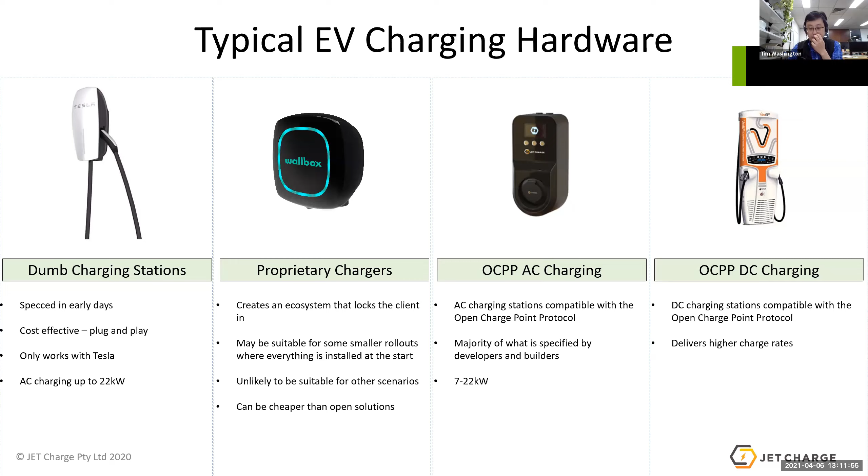Okay, so that's kind of like hardware, and you can go into the weeds a little bit on that, but that's essentially an overview of hardware.

An equally important topic is this concept of energy management, because most buildings won't have enough electrical capacity - even greenfields - to service 100% of the car park when everyone's charging their cars. So you need energy management to make sure that whatever capacity you do have is spread between the charging stations. So how does it work?

It works pretty much exactly how you think: when there aren't too many cars, they all charge at the full rate. At night, when cars start coming back from work and the lifts are going, aircon and induction cooktops are on and all of that, it lowers everyone's charge rate or queues people depending on the system, making sure the charging doesn't take as much electricity. Then when everyone's gone to sleep, and there's less electricity being used by the building, the charge rate ramps up, and all the vehicles are fully charged in the morning.

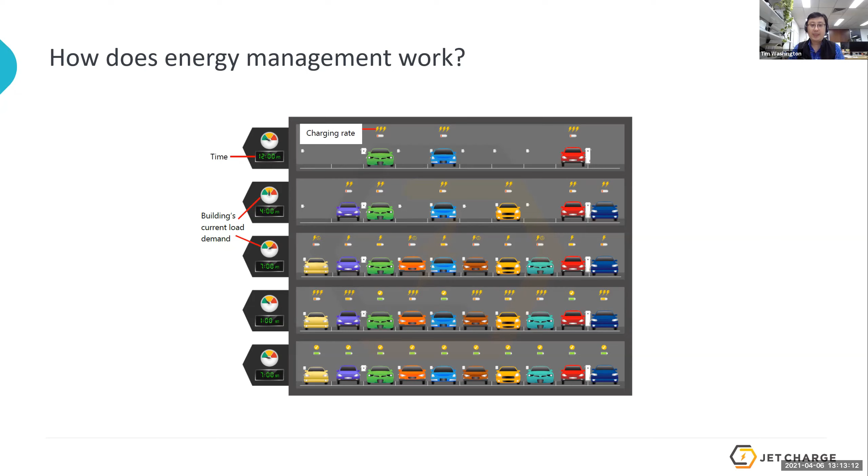There are a few systems in the market that can do this. JetCharge has one thing called JetCharge Core, and basically it just makes sure that none of the circuit breakers trip.

I won't go through this in too much detail, but essentially what you're looking for in an energy management system is something that works with different types of chargers and different types of software platforms. That's really important.

So how does it work? Basically, it dynamically analyzes how much capacity is available on each circuit, and then allocates that capacity to charging stations that are connected. I think this graph probably doesn't mean much at the moment without context.

But what it's doing is detecting excess solar being pumped into the grid - this is actually our office. And if any vehicles were charging, it would take that excess solar and pump it back into the vehicles, as well as whatever else the vehicle requires. So this happens on a building by building level, precinct by precinct level.

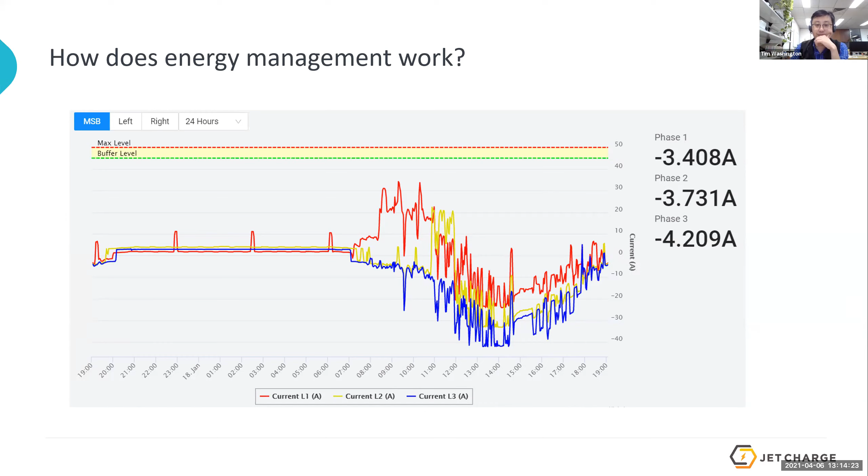Even more than that, as we go to the next step, which is essentially not only being able to charge when there's enough capacity, but also being able to discharge the vehicle when the building doesn't have enough capacity. This concept is what we call bi-directional charging, and that's going to happen probably in the next 4 to 5 years.

We're currently working on some fairly bleeding edge projects where we're taking electricity out of the vehicle to support the grid when it's under pressure. In the next 5 years, a lot of vehicles are going to be able to do this. And when you start having fleets of vehicles in the building capable of bi-directional charging, they have the potential to replace stationary storage.

Except the developer hasn't had to pay for that, right? It's the individual tenants who pay for that, and you're utilizing their battery through a variety of different business models. And what it allows you to do is meet site requirements in the same way a battery would. It's just something to keep in mind.

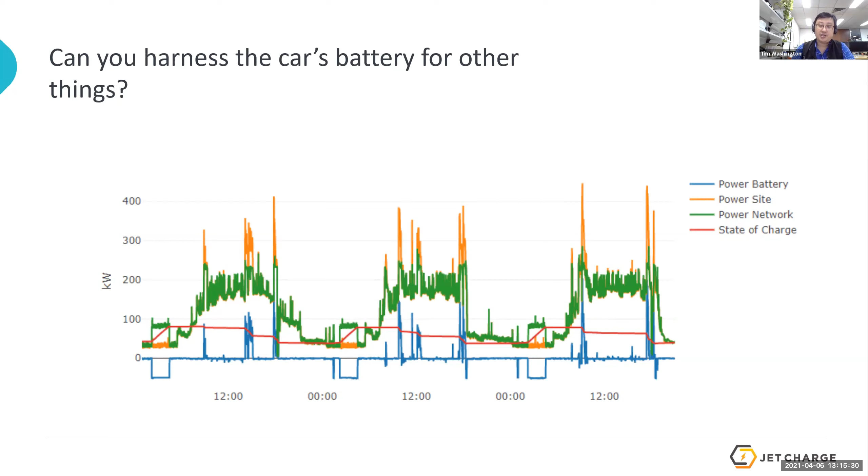People use energy management for different reasons. For some of our clients, it's essentially to make sure that they don't trip breakers. For some, it's to make sure they keep their demand charges on the electricity side really low. And then others, for example with bus depots we're working on, it's to make sure the buses go out on time, but for the lowest possible cost. So you start needing energy management for different things.

Then the last thing we touch on is this concept of how do you monitor the electricity going through these charging stations and bill for it. Without being too salesy about it, that's what we use Chargefox for, though there are other platforms on the market that do similar things. It basically measures how much electricity is going through the charging station and then bills accordingly, either on credit card or through an actual bill.

All of the charging stations you specify into these buildings should have the capability of having billing requirements, because long term no one's giving stuff away for free, everyone is going to want to recover at least the electricity cost. This is already very established in the markets we work with: all the charging stations are connected, they're all OCPP compatible, and they're all connected to a platform like Chargefox, which gives you a dashboard showing how much electricity is being used. You can get this from different service providers.

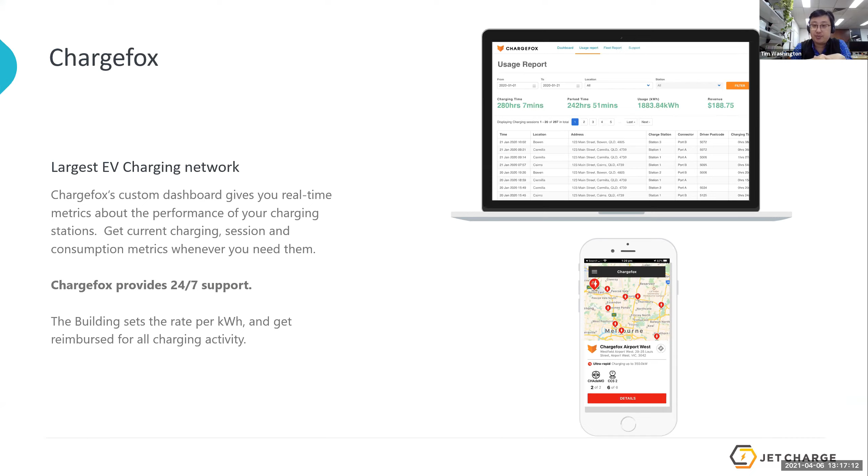The last thing I'll talk about is retrofits. There's a real stigma around retrofits within the EV charging world because it's seen as too hard, that you can't do whole buildings worth of charging if they've already been constructed. But it's something we say you can do, ranging from a single charging station in someone's own car space all the way through to whole of building fit outs.

And there are a lot more brownfield buildings than greenfield ones. So with energy management, you can transform an entire existing building into one that caters for 100% penetration of electric vehicles. But it requires energy management, good planning, and some sophisticated electricals. So retrofits are possible.

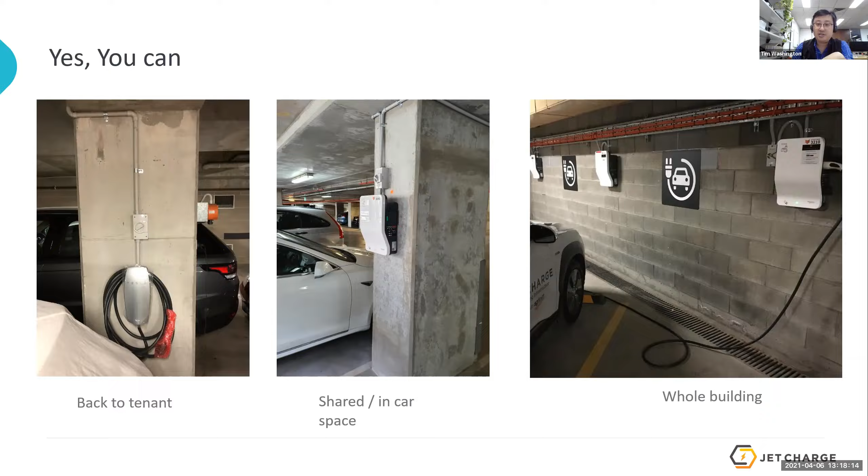So look, it's a pretty big topic, and there's a lot that goes into the design of an EV charging system. But the overall message I want to send is that EVs are coming, and it doesn't really matter whether they're coming this year, next year, or in 2025. When they do come, it will be at a rate that not many of us are prepared for, including us here at JetCharge. It's just going to be too fast. But they're all going to come. It's going to be a really important part of our buildings and really important for us to achieve our environmental goals as a country, so I encourage you to start looking at it and designing for it.

I'm going to jump straight into sharing the screen, let me know if that's worked. Is that going, Jennifer? Yes, that is fine, it just needs to be flipped over to full screen. Is that better? I think we can still just see the preview. Hang on, let me try that again then. I'm on twin screens here and it gets a little bit confusing as to which one I should be running. Is that better? Can't see it yet. There we go. Perfect, great.

I wanted to talk about sustainable buildings and a different way of thinking about how we manage our cities, using water as an example. This first diagram goes back to Edwin Chadwick, 1843, and it's still very much how we plan water use in our cities. The idea is you find somewhere out in the bush with a big dam, bring water into the city through pipes, build a whole lot more pipes, put it through a sewage treatment plant and get rid of it. It's a linear system, based around the idea of the city as a unit, as what you're supplying.

Up in Queensland, we use 450 gigalitres of water a year, so you need dams and treatment plants that can supply 450 gigalitres, and then sewage treatment plants that can treat about 75% of that, and send them out to the ocean. That's how we think about cities in all sorts of ways, to some extent energy and transport and a whole lot of other things.

Some of the things that kind of thinking doesn't capture - this is just an example to show what that linear in-out system doesn't account for. This is a diagram comparing a natural forest with an urban area. On the left, with the natural forest, you have rain. Nearly half of the rain falling is absorbed by the trees, goes down into the soil and becomes part of the water table, maintaining a consistent level of water in the creek. Nearly half of the rain falling evaporates and evapotranspirates from the plants, cooling down that whole forest and keeping things cool.

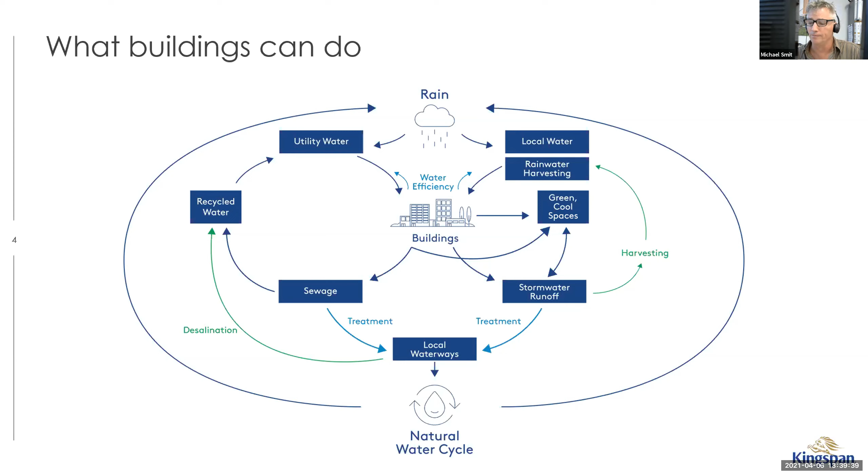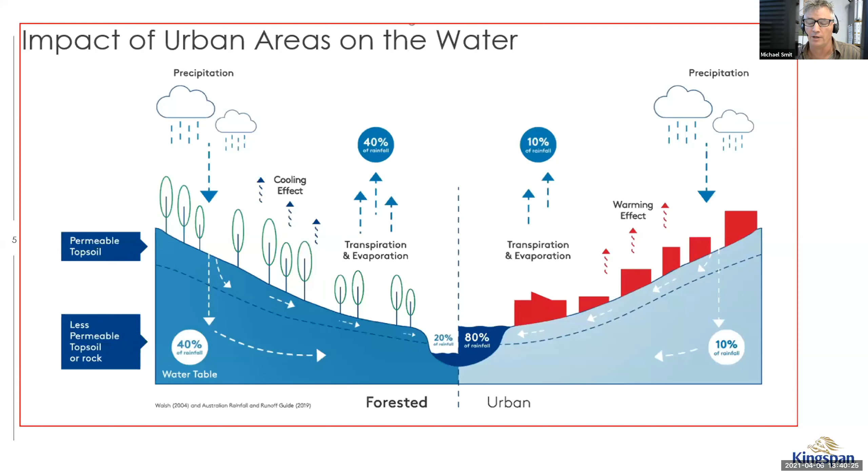Going back to that first diagram where I talked about the difference between natural systems and urban systems - if you imagine putting a house on the left-hand side and getting that building to replicate what's happening in nature, you can have a building that captures 80% of the water landing on its roof, creating spaces where that water permeates down into the water table, giving higher water tables and more consistent stream flows, while more of that water is captured and used to maintain green spaces around it. So you start to replicate that 40% transpiration and evaporation, cooling down those cities.

This stuff has been around for a while. What's really interesting is some work that Peter Coombes has done, looking at how these small design changes can impact the whole city. It's quite difficult to explain big data and systems frameworks, so I've used an example which is by no means perfect, but I think it gives you an opportunity to see how it's a different way of thinking and a different scale of thinking.

So I've used traffic as an example, and traffic and transport aren't part of the modelling work that Peter does generally, but as an example, when we look at a city, we might say there are 7 vehicle movements every day for every dwelling. So 100,000 dwellings will give you 700,000 vehicle movements moving around the city - that's looking at the whole city and traffic movements right across it.

Using new technology and the kind of thinking that Google uses, you can use what they call big data, which is very detailed data at very small time frames. Google uses the actual data about where cars are to map traffic, using thousands, millions, tens of millions of data units to create a model of how the city is moving and how transport's happening.

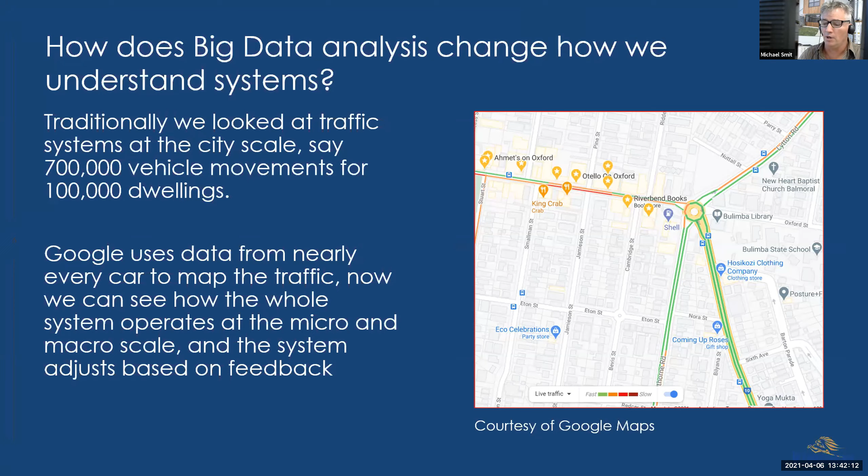Not only is it a model of how many movements there are, but because it's a live system, you're also getting feedback from the system, so that when you get higher points of traffic use, the traffic around that starts to adapt - it goes, no, I don't think I'll go down there, there's too much traffic, and starts to take different options. So you get a dynamic feedback within the system. That's not a bad metaphor for the kind of work Peter Coombes is doing.

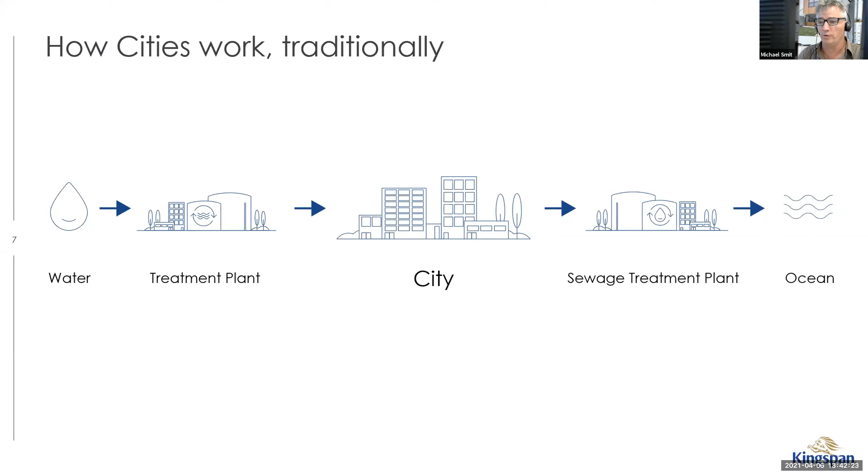Dropping back to that diagram before, traditionally we've looked at the city with water moving in and water moving out. What Coombes has done is look at water flows - not just drinking water, but utility flows for water and sewage, because there's obviously a close connection between those two, but also the stormwater.

Peter's used data at 6-minute intervals based on the detailed behaviour of both households and the utility network. We tend to think of all buildings in the city being roughly the same for modelling purposes - Peter said, well, no, that's not right. A townhouse, an apartment unit, or a separate house will use water very differently, and the number of people in the house will change, along with their income and all those sorts of things - and then they're influenced by the weather.

How we use water is actually influenced quite a lot by whether or not it's raining, whether we're in drought, or whether we perceive that we're in surplus for water. So he's modelled those sorts of things at those 6-minute time sequences for over 100 years of climate data.

That's created, and a digital twin's not a bad metaphor for that. He's created a model of the city, and having that model, we can start to model different scenarios - say, what would happen if we had a rainwater tank on every building? What if we only used desalination? What if we built big recycling plants everywhere? What's happening now in terms of water getting from treatment stations to the house.

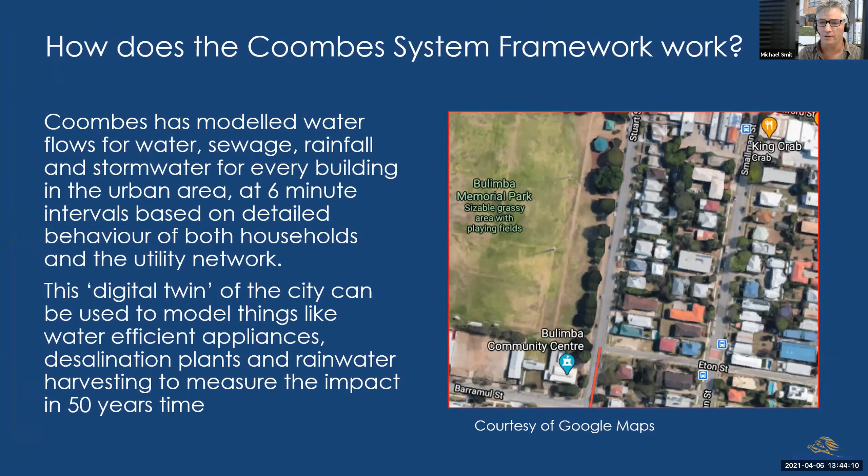What would happen if we modelled those things - we can actually measure the benefits. So we used BASIX in Greater Sydney to say, what would happen if we didn't have BASIX? What differences would we see? We did a retrospective of what would happen between 2004 and now in terms of cost, but also the likely benefits of BASIX out to 2050. We worked out there was a saving of around $3 billion in water and sewage costs, just under $1.5 billion in stormwater costs, $2 billion in stormwater nutrient costs, and total benefits of around $5.3 billion. So you might say,

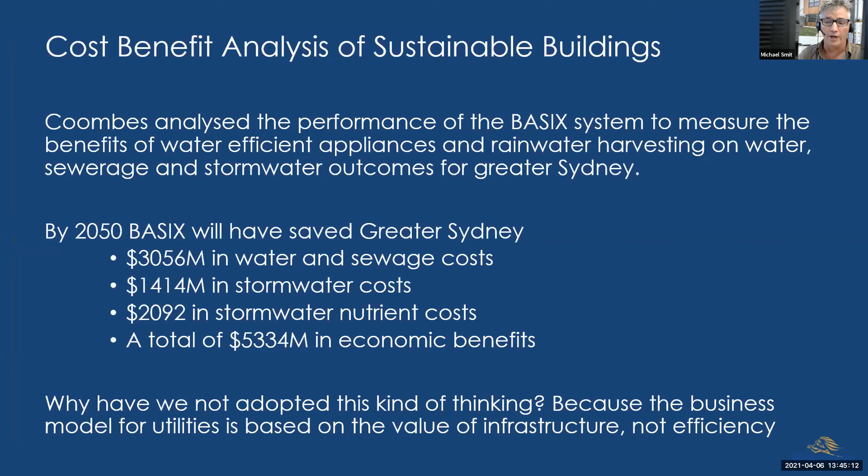given those kind of benefits, why are we not going down that track? Part of the answer - not the whole answer - is the way we think. We've traditionally engineered our cities, and the business models we've put up have been very much about recognising infrastructure and basing the way we pay for water on that infrastructure, rather than looking for greater efficiencies and those kind of opportunities.

So I wanted to talk a little bit about better buildings and some thinking about how we can shift our cities toward changing the design of buildings so the whole city works better, why that's not happening, and how that might happen.

One of the things I think is really important is that we need to recognise that private business - I work for a manufacturer, we make rainwater tanks - businesses are about having profit, and that's what they're good at. We're good at building rainwater tanks efficiently, with good quality, and we expect to make a margin on that. That's our business. We and most businesses are not necessarily well aware of the environmental impacts in terms of stormwater and water, the cost of treatment plants, polluting effects, and what the community needs - and we think that's the role of government.

So we think it's really important that government should step in and make the rules for sustainable buildings, and those rules should reflect local conditions, but there shouldn't be a lot of discretion, because that's not fair to businesses. They should know what the rules are - my experience of most designers is it's better to know the rules up front rather than negotiate, because that takes longer and there's less certainty, less business certainty. Then the role of the community is to elect decision makers who can make a good decision on our part.

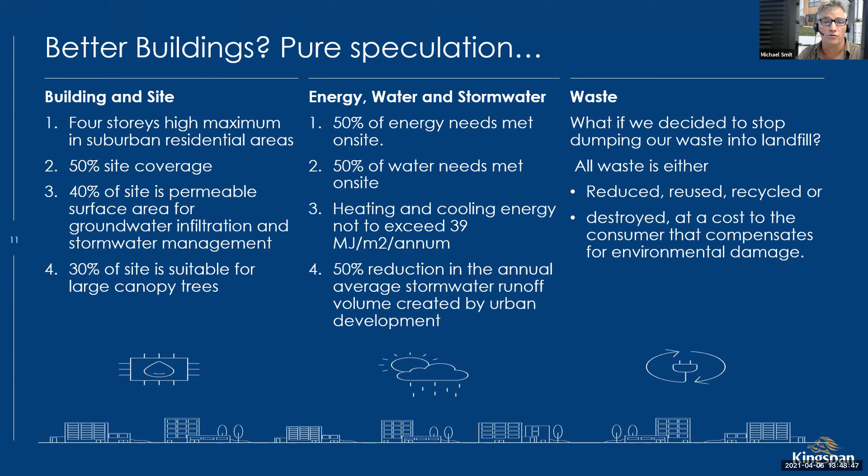And then lastly, waste, which is again a bit of an extension, but it's an area I've had some experience in. What would happen if we decided to stop dumping our waste into landfill? What if the waste coming out of our buildings was either reduced, reused or recycled? And if it had to be destroyed, then it would be destroyed, but at a cost that reflected the impact on the environment.

So I said we talked about rainwater harvesting, and I know many of you do rainwater harvesting, and we are really impressed by the level of interest from both the community and in professional circles.

I just very briefly, and there's a link at the end of the presentation to this, wanted to talk about the residential design specification for rainwater harvesting. This is a national guide, so obviously local controls may change this in different places, but it's a very simple 12-page guide that talks about the roof, the ways of collecting rainwater, treating and managing rainwater, the tank, the pump and bypass systems, and tries to put all that together to say this is what, over a long period of time, we - and Professor Coombes has done a lot of background work in this area - think is the right way to go.

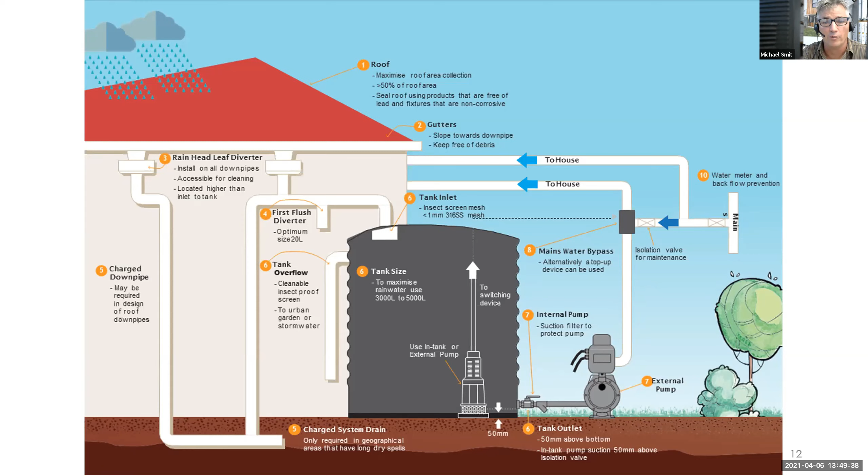So how am I doing for time, Jennifer?

You are doing fine for time, Michael. There's a couple of questions - do you want me to ask now, or do you want to save them for the end?

Oh, look, I'll just very quickly go through the case studies. Yep, I'm really just going to touch on them, and then I can go fully fledged on whatever questions. No worries at all.

Okay, so this is a nice little Australian example. It's a library, and the challenge was to try and combine good design and a good looking design with reduced energy consumption and water consumption strategies. We provided a series of water tanks which we felt met the design aesthetic really well, but also provided really practical benefits in terms of suitable water for flushing the toilets on site, reducing mains water usage, and improving the stormwater performance of the site.

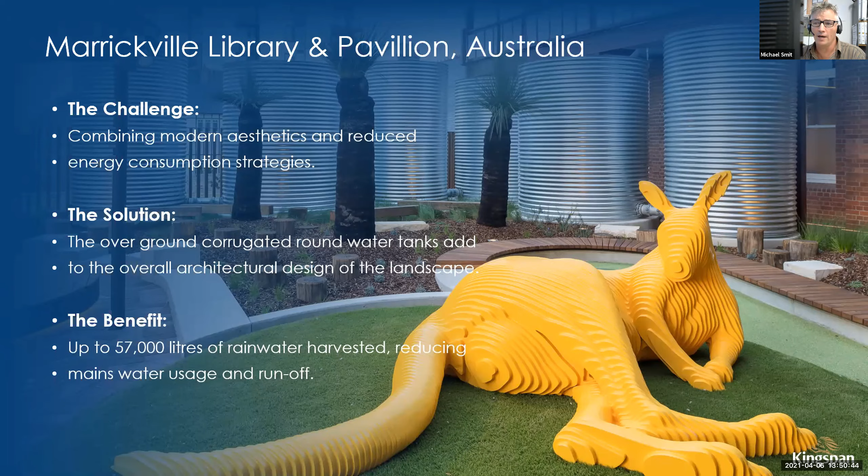Pascoe Vale, so this is for our Melbourne friends. This is just a set of apartments that's been built there. These are quite small rainwater tanks, so 1,500 litre tanks. There's obviously a benefit for rainwater use, but they're mostly in there to ameliorate the stormwater effect - some of that stuff I was talking about before, in terms of large flat concrete areas which are generating enormous amounts of runoff and having a really permanent deleterious effect on the local waterways around there, so Moonee Ponds Creek, Merri Creek, those places.

75% of the roof catchment is harvested, which has been a dramatic reduction in mains water demand and also the runoff.

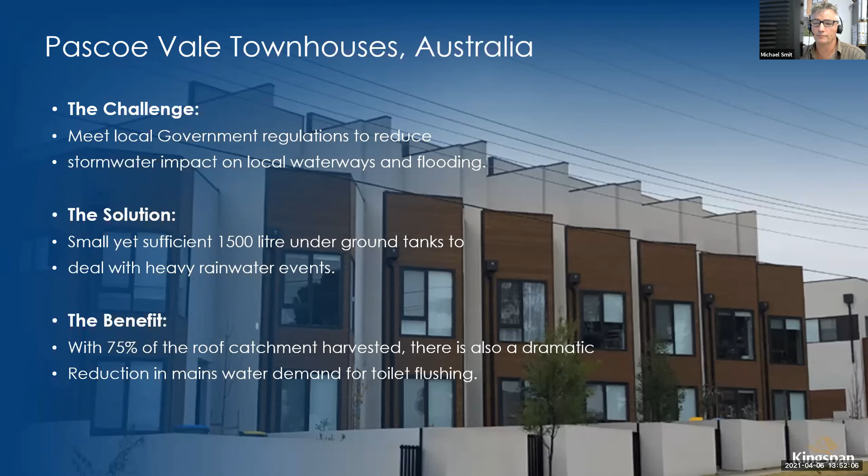So thank you for that.